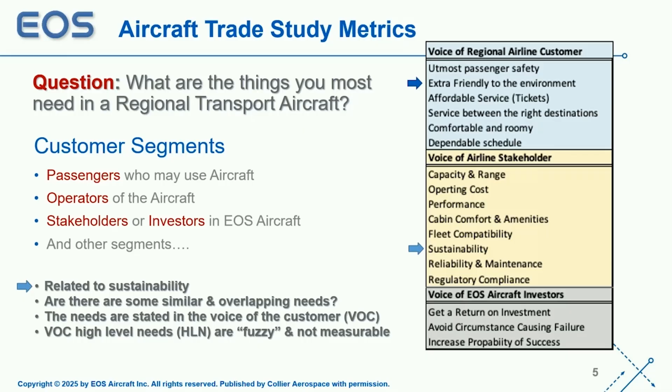When you survey them, you find some overlapping needs. Some are similar, and sustainability was one of those. But when you talk to the different customer segments, you get their voice in their own voice. So you have to translate that. Sometimes it's fuzzy and not really measurable. So we have to use a tool to kind of organize the voice of the customer.

This is just an overview of what's called quality function deployment. I'm sure many of you have used this in the past, very familiar with it. But it's a subset of the requirements management process. So we take the survey data, the high-level needs, and we convert that into what's measurable.

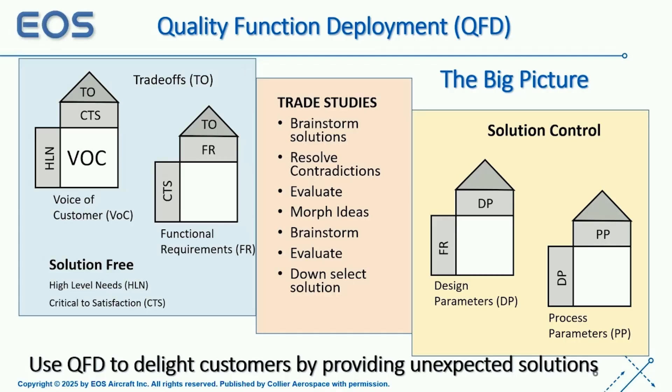What's critical to the satisfaction, we derive that, and we build this first house up here. Then we look at what functions it's going to take to move those critical to satisfaction metrics in a direction that customers want. Those first two houses, including the roof of the house, really capture the trade-offs—which metrics, when improved, help other metrics, so they're compatible, and which ones are contradictory.

That really becomes some opportunity for innovation. But the first two houses are really solution-free, and that's how we set up the trade studies. So we go in, brainstorm some ideas, some solutions, and look at the roof of the house, identify those contradictions. We have some special ways to handle brainstorming through and resolving those contradictions. We evaluate them, pick the best features of a set of ideas, then trim out those features that are more harmful, and cycle the process to come out with a recommendation.

And then we build the other two houses eventually, design parameters and process parameters. But the bottom line here is that when we show a customer what it is we're going to propose, it's going to satisfy their request. They might not expect the solution they're going to see. So we want to delight the customers.

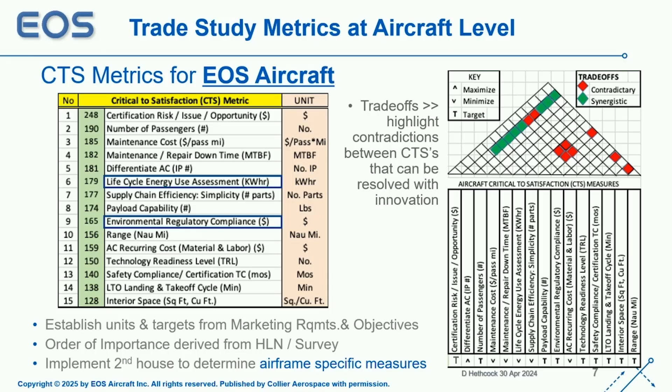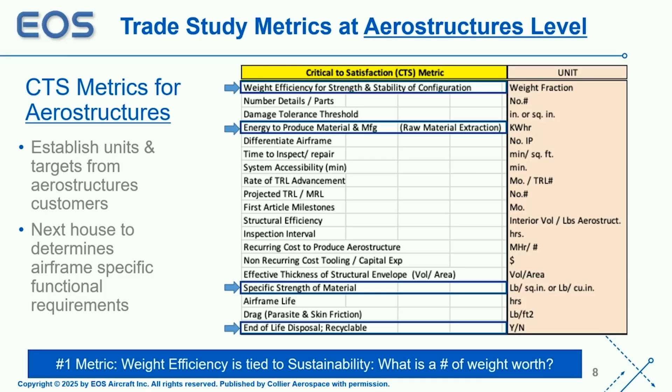So here's a list of different metrics at the structural level, and we can see that these also involve different customers. We'll have different suppliers that are involved, that'll have different capabilities, and we want to make sure that whatever solution we come up with gloves into what they can accomplish. Different parts of the airline organization, and then the engineering organization at EOS.

So what resulted here was that the number one metric is weight efficiency, and it's really tied to sustainability as well as the energy to produce the material and manufacturing, raw material extraction, specific strength of material, and at the bottom there, the end-of-life disposal. How do you recycle the aircraft at the end of its life? So that begs the question, what is a pound of weight worth?

So the first decision, really, what is the value of weight savings, is what material do we use? And so to set up how we answer that question, we want to develop a cost-weight metric to serve as a means test for incorporation of weight reduction ideas.

Our approach would be to determine the life cycle energy costs for in-service operation and determine the energy costs required for representative flights over the expected lifetime of the vehicle, including some realistic assumptions on segment ranges, load ratios, margin requirements, and energy costs, and then calculating life cycle cost per pound, the threshold requirement.

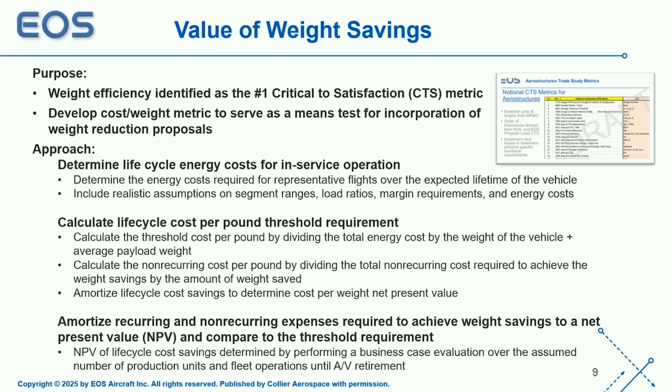By dividing the total energy cost by the weight of the vehicle plus the average payload weight, and then the non-recurring cost per pound divided by the total non-recurring cost required to achieve the weight savings by the amount of weight saved. Then we amortize the life cycle cost savings to determine the cost per weight net present value.

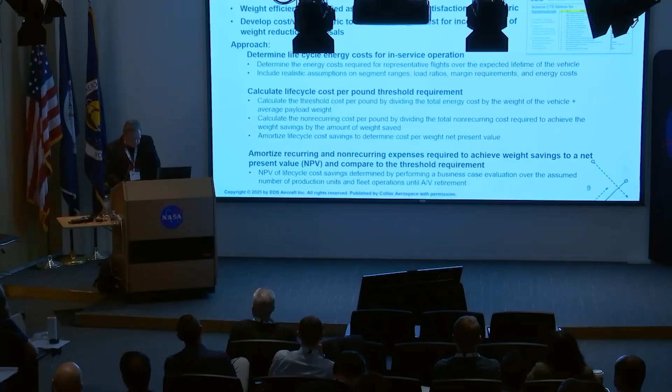So we amortize recurring and non-recurring expenses required to achieve weight savings to a net present value and compare that to a threshold requirement. The net present value of the life cycle cost savings is determined by performing a business case evaluation over the assumed number of production units in fleet operations until the aircraft retires.

So we can establish a hurdle for onboarding new technology by this calculation of the energy cost per pound. Some of the variables we're dealing with are the mission range, the average diversion range, what percent we have to add on top of that for distance, the fuel cost, electricity cost, the battery life, the battery density, the fuel used, the total fuel cost, the energy used, the total electric and energy cost, the payload fill level, and effective payload, and the takeoff weight.

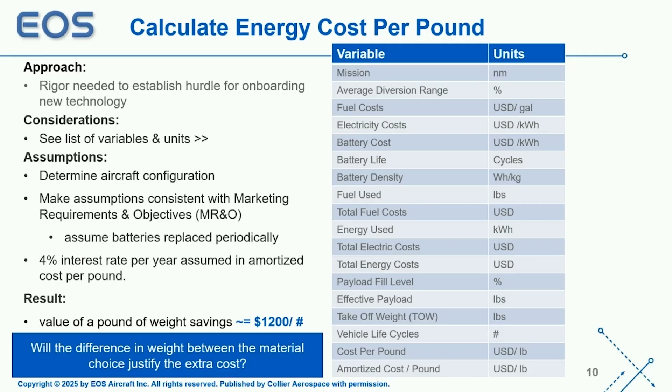So that just shows you some of the inputs that we use to calculate this value of a pound of weight. We also had to consider battery replacement and some interest rate. So we ended up with about $1,200 per pound saved. So if you consider, just making a material choice can be multiple hundreds, even thousands of pounds difference.

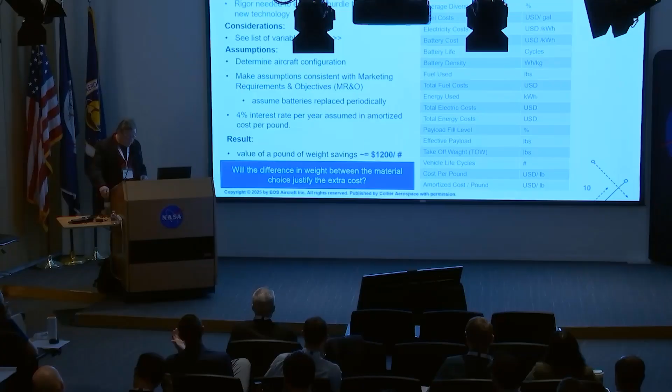And then looking at the number of aircraft that are sold or that an airline would have in their fleet, that number can quickly climb to a very large number. We're talking hundreds of millions, even approaching $1 billion. So once we amortize the cost, it drops down to about $1,200.

So looking deeper at some additional considerations to approach this material question, we note the weight fraction of battery modules and the related systems that support those modules can be in excess of 25%. Weight remains the biggest limiting factor for battery-powered aircraft. And even at 600 watt-hours per kilogram, aviation batteries are 20 times less energy dense by weight than jet fuel. So taking on that additional weight on the aircraft is obviously very challenging.

And the right weight savings opportunity for the primary structure is needed to satisfy the business case hurdle. So any new approach to the primary structure must buy its way onto the program.

And this technique allows us to make those decisions that are data-driven. We want to make and apply cost rules of thumb at this stage, this conceptual stage, and find easy methods to look at relative weight comparisons that are needed between sets of metallic and composite configurations. We have limited access to legacy weights databases, which really exacerbates our challenge.

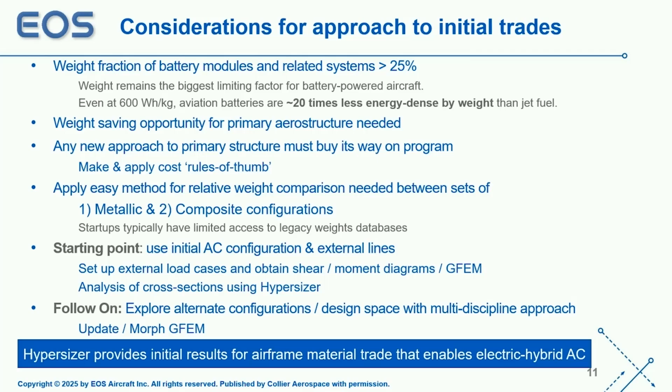So as a starting point, we were working with a team of NIAR engineers. When you have a handful of engineers, you kind of use what their capabilities are, and some were already trained to use Hypersizer. So we built our GFEM, got the external loads on it, and developed some shear and moment curves, and looked at a cross-sectional approach using Hypersizer. That was our starting point.

And then we filled out this matrix, went back, and then as we refined our analysis and looked at other more details, we were able to actually consider a multidiscipline approach and morph our GFEM and build on that. So Hypersizer really provides initial results for airframe material trade, and it really enables an electric hybrid aircraft.

Okay, so these are some of the wing airframe configuration options that we put into our consideration. We had three metallic options: Z-stiffened, aluminum fastened, bonded Z, and advanced assembly, where we didn't have to drill on assembly. And then for composite, we're looking at a mixture of hats and tees and sandwich options. So with materials - aluminum, carbon epoxy, thermoplastics even - these geometry, stiffener shapes, and then for manufacturing processes: automation, AFP, infusion, co-cure or co-bond, and then for the thermoplastic, obviously welding.

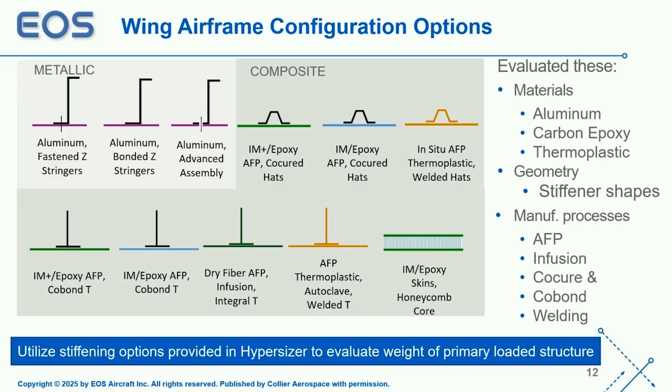So we utilize the stiffening options provided in Hypersizer to evaluate the weight of the primary loaded structures. So here is our data, kind of summarized and normalized, but this in-depth evaluation is really necessary to overcome significant resistance over making a decision to go to composites.

There's still a lot of experienced people in the industry, especially on the commercial side, for this size aircraft that are very resistant to make that leap from metal to composite. They've had some bad experiences, and they don't want to repeat those. And so we have to really dig pretty deep to convince them to make that decision.

So we're looking at 11 design concepts - it says 10 there, but there's one more, I believe - against the 19 parameters that came out of the QFD. And we used Hypersizer for the first pass, but then HyperX, we came in on the subsequent passes.

The blue points are vendor quotes. The green, I think, comes directly from Hypersizer. The brown are parametrically based, and a lot of those parametric numbers are weight-based, and then the red is just a WAG.

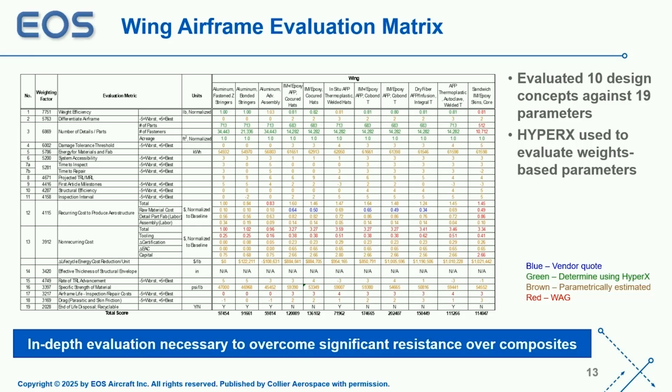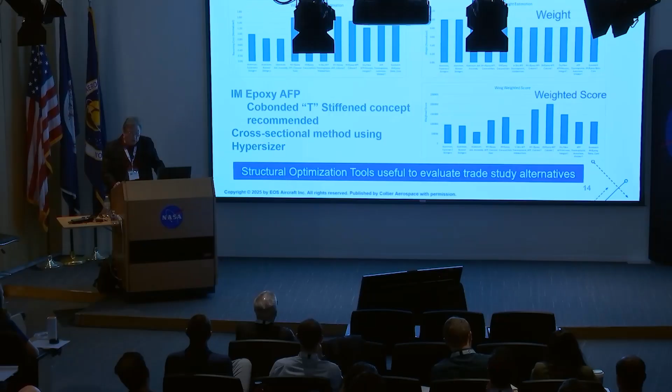On the first pass, the initial wing airframe results show that the metal option is significantly heavier than the other composite options as a general rule. Some variation in cost, obviously, and on the weighted score, we end up making a recommendation for intermediate modulus epoxy.

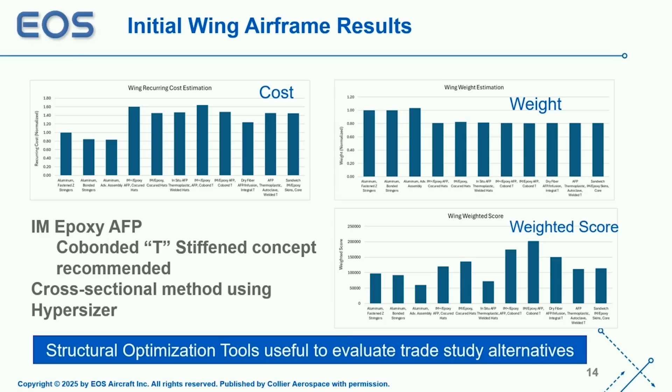Okay, and some additional details of the recommendation. We also looked at the fuselage, the wing, and the empennage. The results showed an overall weight reduction of 27% on average, an all-electric range increase of 20%, and improved

corrosion and fatigue resistance. The cons were the recurring cost increase of 6.5% per aircraft. The additional capital equipment to utilize composite would maybe limit the supplier base. There's less number of suppliers that have that experience. And then the non-recurring costs with the delta estimate at complete engineering costs as well going up.

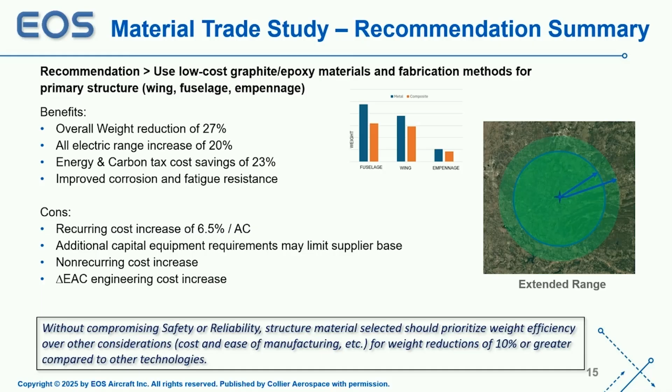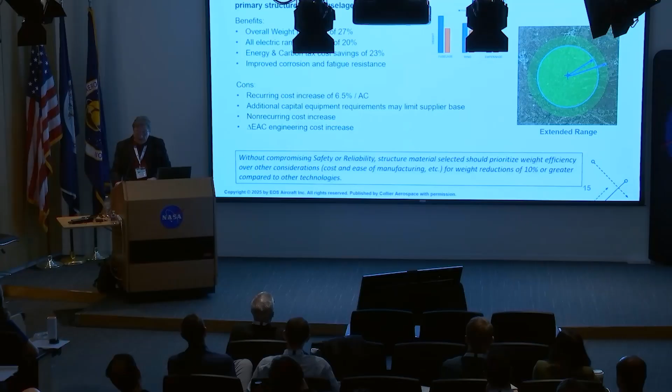So fortunately, in our MR&O document, it stated that without compromising safety or reliability, the structure material selected should prioritize weight efficiency over other considerations, including cost and ease of manufacturing, for weight reductions of 10% or greater compared to other technologies. So this would seem to qualify, but we're still challenged with executive acceptance, and they tend to second guess, and they're continuing to challenge us to justify that recommendation.

So again, just underscoring the rigor necessary to overcome the partiality toward a metallic solution. We gave the material recommendation, obviously using something that was already published to avoid a complete full qual, starting with that, knowing that the building block approach would cause us to have to test specific details. But at least we start with some material specs, some published allowables.

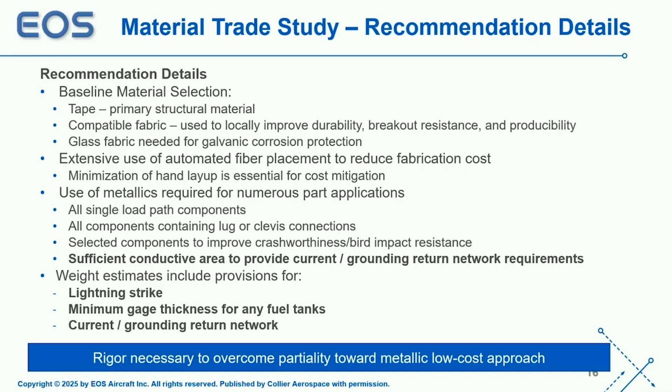Extensive use of automation to satisfy our rate. Smaller hand-laid up composites are not going to be very feasible economically. And then the use of metal, obviously for areas where those are still important, such as single load path components with lugs and clevises or those kind of details. Some components where you need some plasticity for such things as crash worthiness or bird impact, and then having sufficient conductive area to provide a return path, a ground path for the return network.

And so we included estimate adjustments for the lightning strike, for any min gauge thicknesses, for fuel tank areas or hail damage tolerance, and those type things. Okay, so this chart probably looks familiar.

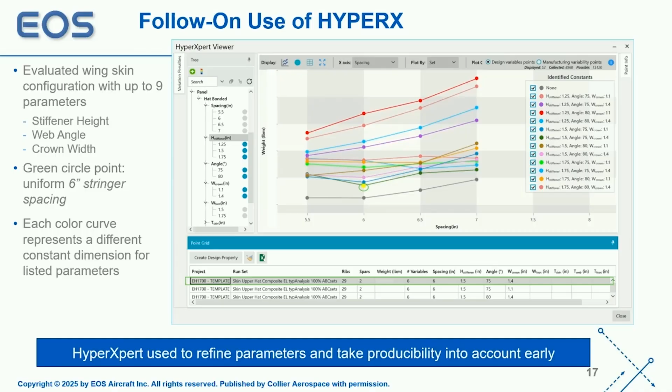One thing we did take advantage of was having the Collier's engineering services, use of that. And so we did apply HyperX to evaluate some additional parameters, such as the stiffener height, the web angle, the crown width on the hats. And then we can see here that going with a 6-inch stringer spacing, we're still at very close to that

curve that says none, which means no constraints. So that was good. And HyperX really was used to refine those parameters with the help of Collier and take producibility into account very early.

So our counterparts over at University of British Columbia reinforced that it's never too early to consider producibility. It's really no need to invest a lot of time looking into something you can't make, right?

And then one of our engineers, Will Conway, I'll give him credit, pulling this slide together for me. We really recommend a starting point with a multidiscipline analysis and optimization tool. If you use HyperX, it does take time to build and modify a GFEM and make sure we have external

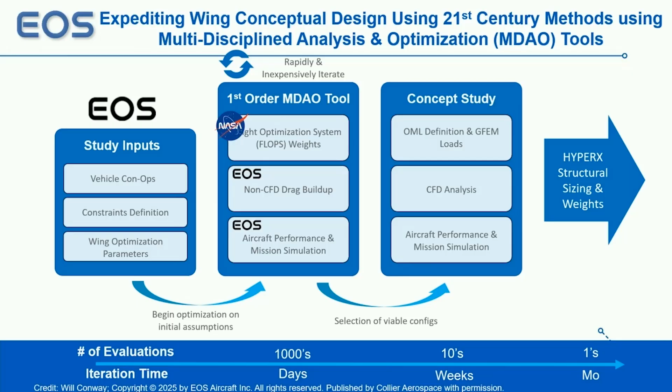loads done. But using a first order approach, we've been able to utilize NASA FLOPS and some non-CFD drag tools approach, along with aircraft performance and mission simulation, to come up with a way to be able to cycle thousands of iterations in days, to be able to find that sweet spot.

I'm talking about changing the OML of the aircraft, other aircraft configurations. Obviously, if we save weight, but it increases drag, where is that trade-off as well?

Okay, so in the background here, we see another one of Luc's early designs, the Diamond aircraft. But the role of optimization tools to address aircraft trade studies, it's really important that we wean off of parametrics to a sizing-based weights as early as possible.

And this is especially important because there's so many unique systems that really aren't accounted for in the legacy aircraft that make up some of those parametrics. So we have to take those into account.

Adopting other accelerated methods, such as model to margins, and I know that's really the emphasis that Hypersizer and HyperX are working toward, but there's still some areas taking local pressures into account, doing local global models. We still have some work ahead of us in that area.

We did take advantage of some rapid mass property tools and some automation tools for external loads with the help of Beyer Flight Sciences. So it was very beneficial to have them on board.

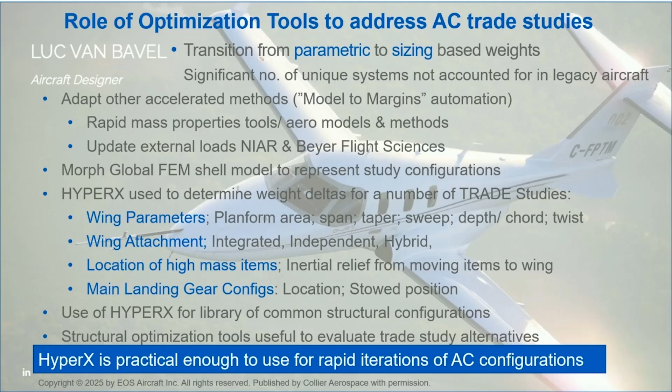And we used HyperX in a number of trade studies, not just the material trade study, but also the wing parameters, wing attachment. How do we integrate the wing with the fuselage? Is it going to be integrated, independent, or some hybrid combination of both?

And then location of high mass items. Locating battery modules on the fuselage presents unique challenges, and then moving those on the wing presents different challenges, but understanding the sensitivity, the weight sensitivity of that move, we utilized HyperX for that.

And then main landing gear configurations, locations, stowed positions. It was very useful because HyperX is really practical enough to help us use it for rapid iterations in our aircraft configurations.

All right, so here we see another Luc Van Bavel design. It's the Freedom aircraft from Sierra Nevada.

So takeaways: establish and survey needs from each customer segment at the appropriate level, and use a systematic approach to affinitize or set their requirements up that are solution-free.

Weight efficiency is the primary driver for a sustainable aerostructure. Use MDAO tools first to explore the design space and establish the configuration lines, and take into account those other parameters.

Structural optimization tools are very useful early in conceptual phases of the program for material selection, weight comparisons, and cost basis, as the configuration matures, and composite applications must be tailored for weight and manufacturing cost.

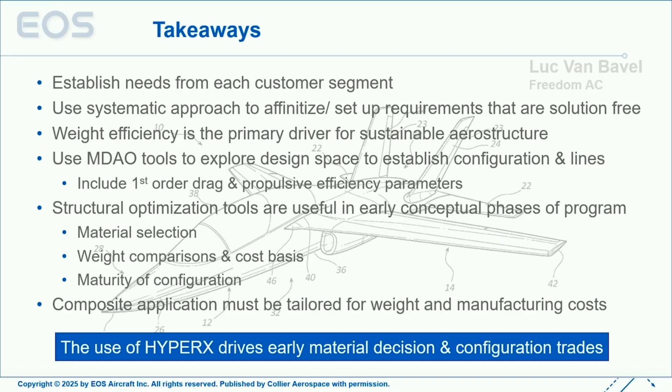So the use of HyperX drives those early material decisions and configuration trades. That's the end of my presentation.

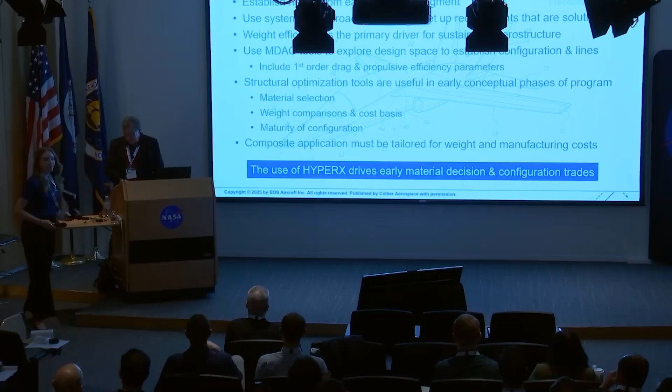Thank you. I was wondering how, when you implemented HyperX, that affected either the amount of concept trades you could perform in a given time frame, or did it impact the time frame for a concept evaluation stage at all?

Maybe you could talk about how that worked relative to past experience or past projects. I used Hypersizer on a previous program, actually on this program, the Freedom aircraft. And it was very useful.

It was useful because we had come up with a configuration that was proprietary, and we had to get some data to back up that approach. And I was very pleased that we were able to incorporate that data.

And use it to compare to some other standardized approaches. We got some unexpected results there that were very beneficial. So that's why I quickly used it on this startup program, because I knew that it would leverage those results.

A number of results and trades that we could do, leverage that up with the existing manpower that we had, for sure. Thank you.

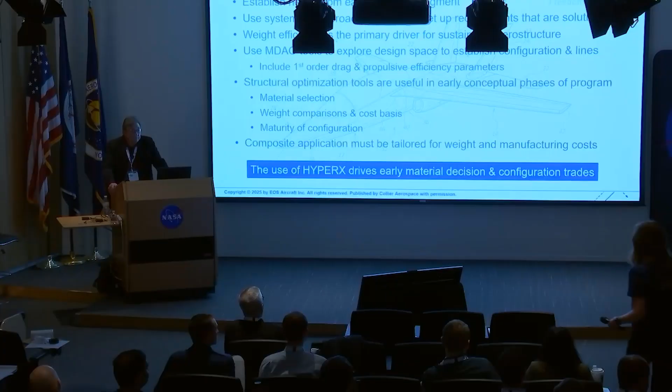Related to the MDAO tools, what role did your structures team, or Hypersizer or HyperX, have in feeding a multidisciplinary tool information about the different structural configurations?

Well, at first, for the wing parameters trade study, they wanted to know what the weight of a certain configuration would be. And so we would have to go through and try and...

size that manually. So I wouldn't say that HyperX was an input to the MDAO tool.

It was more of a go-back-and-explore-the-design-space approach, using a first order, simple formula approach, to be able to get a lot of cycles in and try to tune in on where that sweet spot is.

Then once we have that, we update the GFEM, update the external loads, and then use HyperX.

One quick question I had was, in your material trade study, did you allow post-buckling of the composite structure in the trade? We had some pretty conservative stress engineers on the team, and without test data, they got a little scared.